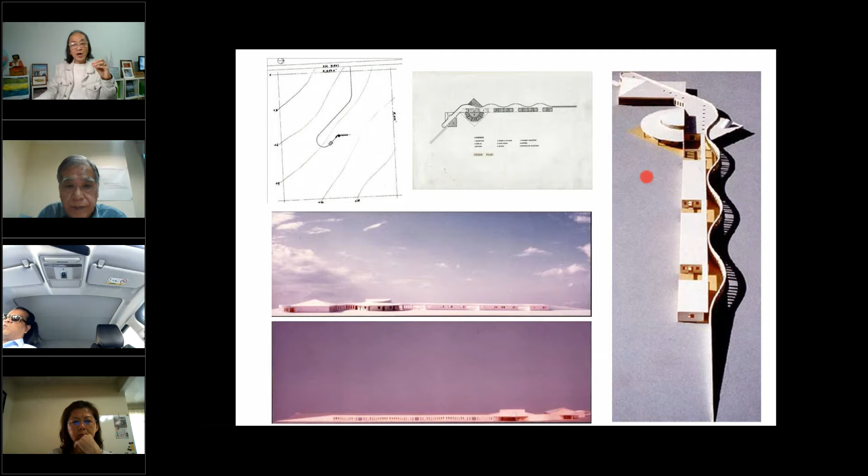In this first project, I learned about a few things. One, how can I place a building? In this case, I can easily place a building right near the access.

I decided to place the access road in the middle of the 100-acre site for a few reasons. To me, the journey to the building, the approach to the building, is as important as the building itself, if you have the opportunity to do so. So I want visitors, whether by bicycle, walking, or by car, when going to the building, to see the western side of the building, and then park further away. They get out of the car or bicycle and walk to the building.

This will prepare them psychologically before they enter the building. So to me, this was important.

The second thing was, how am I going to organize all the activities in the building? It was for a photography retreat of about 10,000 square feet. About 15 students will be in the school for about a week, and every week a new batch of students will arrive. There will also be 5 lecturers, each there for about 3 months. So you have a dormitory, a lecturer's quarters, a studio, an exhibition, and a canteen. How am I going to organize it?

I decided to organize the space in a linear form. I call it linear organization. And I introduced a wall, curvilinear, as a spine to organize all the activities together. Along this spine, or organizing principle, I have the reception, the dormitory, a studio, and the teacher's quarters.

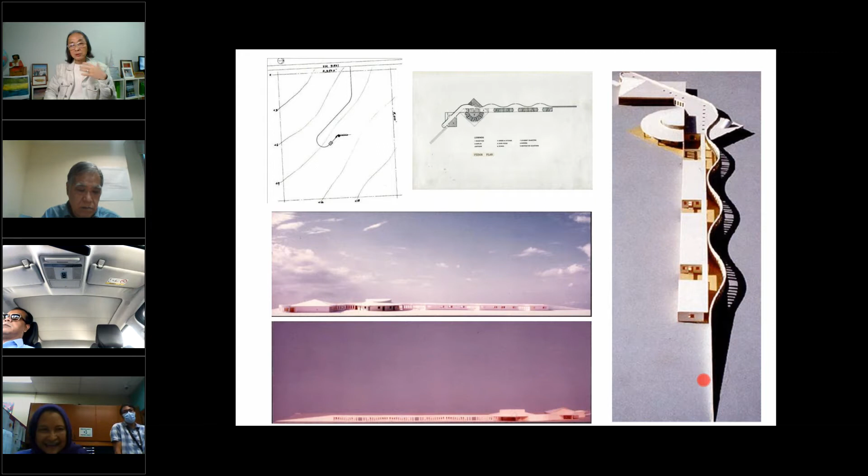At the same time, I want to create some kind of sculptural building in response to this vast landscape of 100 acres. It cannot be like a building on an urban site. The building had to express a sense of freedom, like it belongs to these 100 acres.

So these are the first two principles I learned for my design later on: how I can use a so-called linear organization to organize all my activities, how I can use something formal to contrast with something more organic, and how visitors can approach the building.

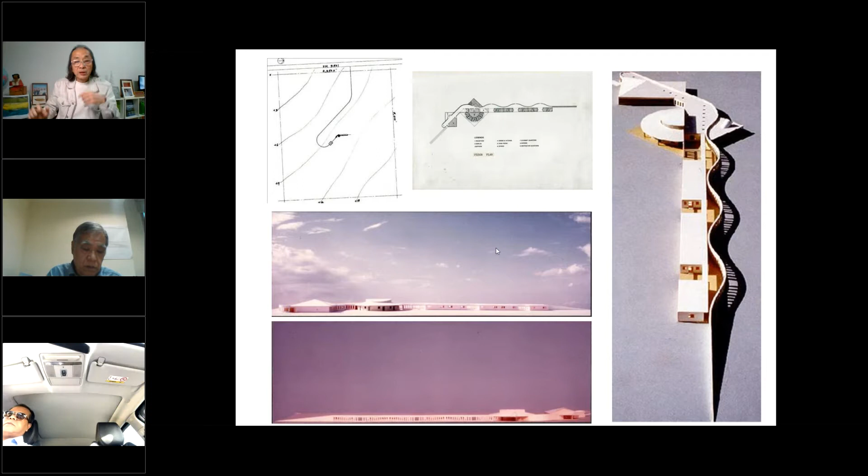The second project, also in the third year second semester, asked us to design a railway station in a small town, in addition to an existing railway station. The existing station was a historical building designed by H.H. Richardson. For most architects, when confronted with designing an addition to a historical building, they'll normally try to make the new building look sympathetic, or more like the historical building.

To me, as an architect or any building professional, we have to read beyond the surface. To show respect to the existing building, we have to understand its characteristics. In this instance, the building is a classical building.

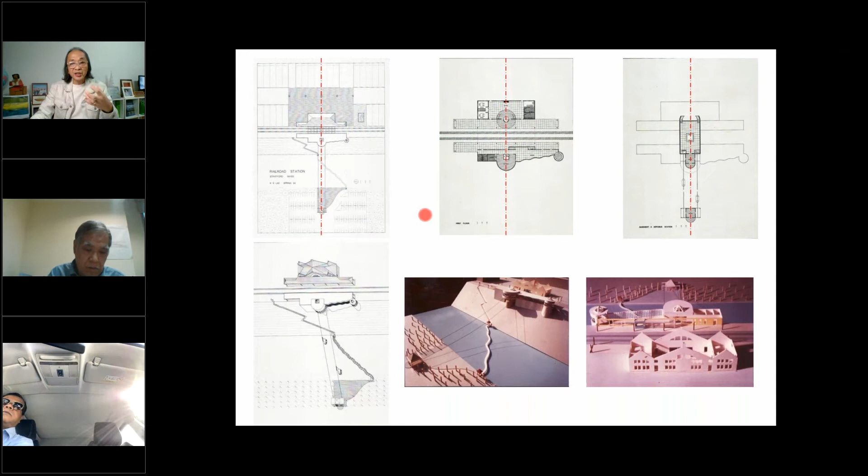It's a symmetrical building with a central axis. So I established an axis across the building. By doing so, the new building, while respecting the central axis of the existing building, can be more organic and more responsive to the environment and the site.

In this case, the new building has to be built on the river bank, and I also extended the axis all the way across the river. As commuters, some coming from the city center and some from the suburbs, they have to take a cable car across the river to the new railway station.

So in this assignment, I learned about axis, about symmetry, again about formality and organic form, and about the approach to buildings from urban and suburban settings - the contrast between formality and organic design.

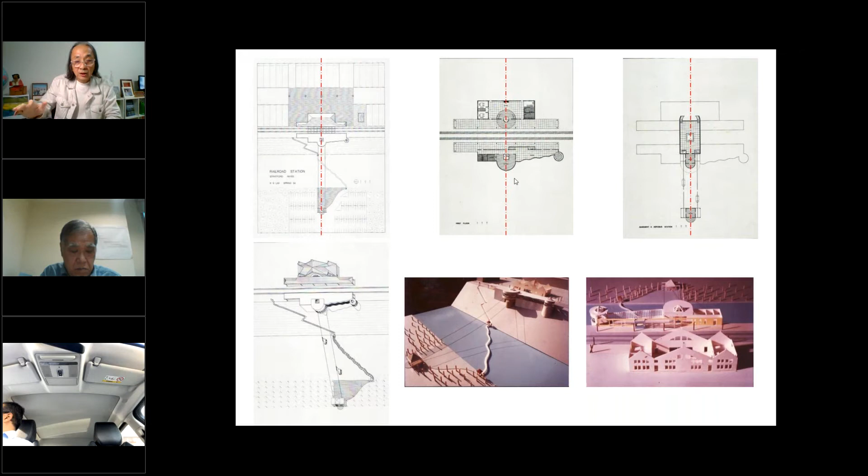During my last 3 years in architecture school in Houston, I worked part-time for 2 established firms, so it was very easy for me to find a job a few months before graduation. In fact, 3 months before graduation, I went to New York for 10 job interviews and received 10 job offers on the spot. I decided to join the Hillier Group, one of the most famous firms in the USA, and I was there for 5 years.

One of the most important buildings I participated in was the New Jersey Aquarium. The site was very interesting, almost similar to the site of my school project.

The building is in Camden, New Jersey, which we call the Garden State. The site is across the river from Philadelphia, to be exact, from Penn's Landing and Independence Hall.

So how am I going to approach the design of the building in terms of urban scale and urban design? Visitors will travel from New Jersey, and some will take a water taxi across the river from Philadelphia, so there are two approaches. How do I address the building's urban form for visitors from Philadelphia far away, and for visitors from New Jersey close up?

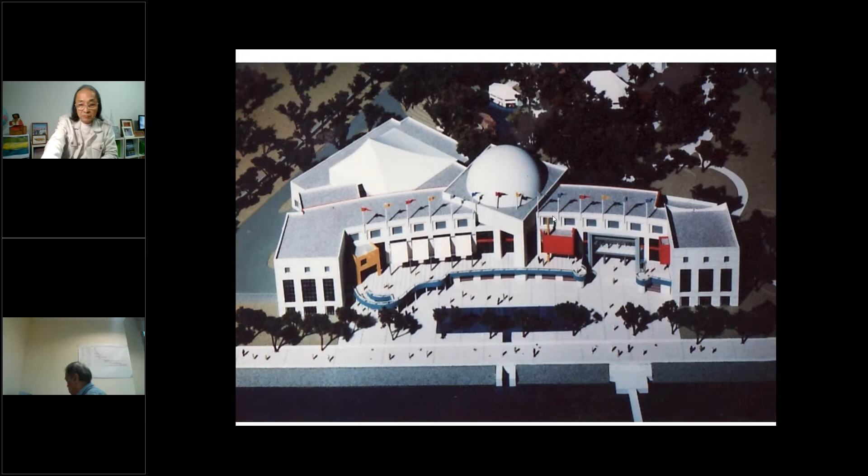I last visited the aquarium in, I think, 1992. And I know my ex-boss, Dato Alan Tong, is going to attend this webinar, so I decided to add three extra slides last minute.

I came back to Malaysia in 1991. My first boss and employer was Dato Alan Tong. I'm sure you all know him, he's a legend in the Malaysian property industry.

My first assignment was to design Mont Kiara Palma, which was phase 2 of the Mont Kiara development. Phase 1, Mont Kiara Pines, had 3 blocks, 10 acres, and 500 units. Mont Kiara Palma was 8 acres with 400 units.

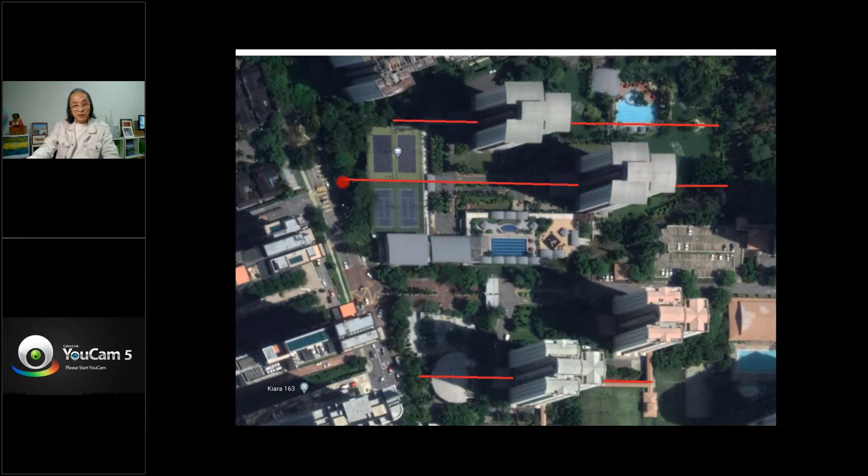I established an axis at the middle of the so-called parking garage tennis court. Along this axis, I have the sitting area for the tennis court and the entrance to the parking garage and so on.

And then we have 2 swimming pools. One swimming pool is above the parking garage, which is a bit more formal. I decided to have a second swimming pool in a more organic, more informal way.

And since we need to have a detention pond, we decided to have an artificial lake. And then we created an island at the artificial lake. And in the island, we have a swimming pool and a restaurant.

There is a short pedestrian bridge for you to walk across to the swimming pool. We created some kind of psychological circulation for you to go to the swimming pool on an island, like you're going to a resort. And we also have an amphitheater near the artificial lake.

And then that's how I located the Royal Tower. It exists together, in axis with the amphitheater.

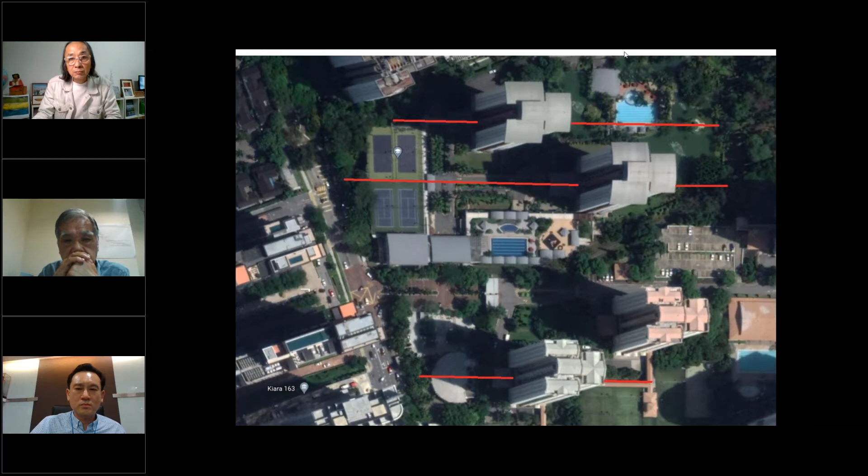This is Mont Kiara Palma. I used to own a unit on the 15th floor. I was hoping to buy floor number 8 or the 18th floor, but they are more expensive - Malaysians love number 8 and so on. So I ended up on a unit on the 15th floor.

So I have to go back to this one again, sorry. My second project, designed while I worked for Dato' Tong, was a shoplot in front of Mont Kiara Pines - a small shoplot. I introduced a half circle, to have something more formal on one side facing Mont Kiara Pines, and something more organic facing the busy traffic surrounding the site.

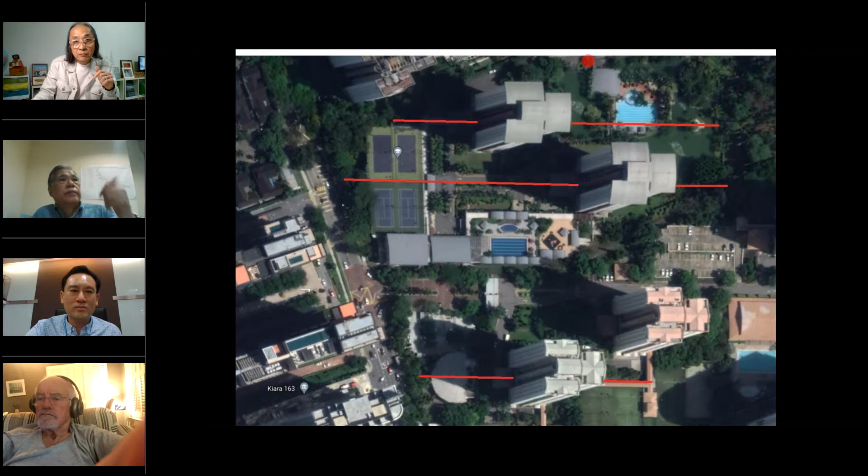This is the Mont Kiara shoplot. And then in December 1993, 2 weeks after I joined BEP Architect,

I was asked by one of the directors, Mr. Ho Wai Peng, into his office. He said he had one good news and one bad news to tell me. The good news was BEP Architect, at the very last minute, was invited to submit a design proposal for Putrajaya, the new capital city of Malaysia.

It was an honor and a super important job for the company. The bad news is I've been appointed to design it, and I only have 2 weeks to do so. It was 4 p.m. and he gave me a topography map. The same night, at about 10 p.m., I went back to the office, to one of the small conference rooms, to think what I should do about the project since I only had 2 weeks.

As I did not have time to visit the 11,000 acre site in Prang Besar, I looked at the topography map, trying to get some inspiration, some clue on how our new capital city should be. In my mind, two things came across.

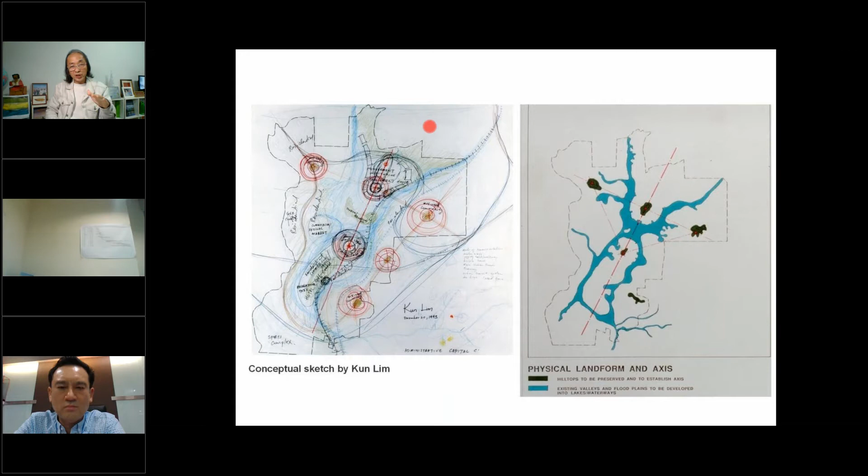I looked around the topography map for inspiration again, and I found there are 2 rivers nearby, Sungai Langat and Sungai Chuau, and some low valleys and river streams in Putrajaya, or Prang Besar. I looked around for a contour point of 22 meters, and decided I should fill up this area with water. And thus we created a so-called semi-artificial lake.

So this was the initial concept of Putrajaya, and it was created in 10 minutes.

And I asked the perspective artist with BEP Architect Research to come in to help me produce some drawings, together with a few of my former colleagues from BEP.

In my mind, Putrajaya has to be a garden city. And I lived in Princeton, New Jersey for 5 years. To me, Princeton is a garden city. When you're in the garden city, you do not have to go to the garden anymore - the city is a garden. And in the garden city, the garden, the environment, the landscape should be more prominent than the building or the infrastructure. That's what I had in mind.

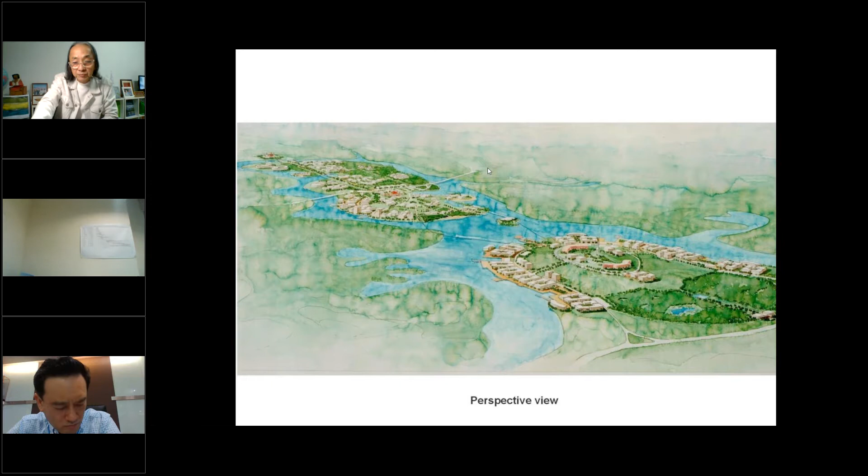Along the spine, we have certain government buildings. As I know this is going to be a government, we have to have certain formality. But at the same time, I do not want the so-called central axis to be too powerful.

There's a reason in this early concept we have a core island. There's no continuous boulevard like what we have today, because we want it to be very important, very monumental, but at the same time I do not want the Prime Minister, where his office will be located on top of the axis, to think he's a king.

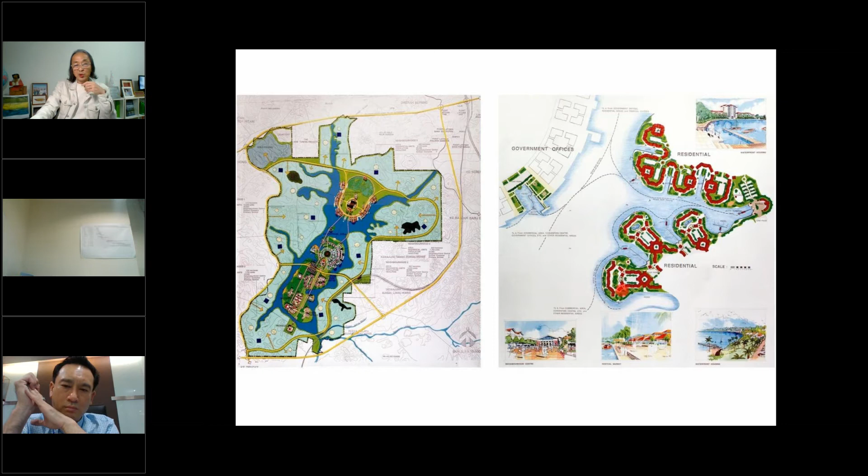We also want the residents in Putrajaya, beside a normal public transport system, to be able to use a water taxi to go to work, to go shopping, and so on.

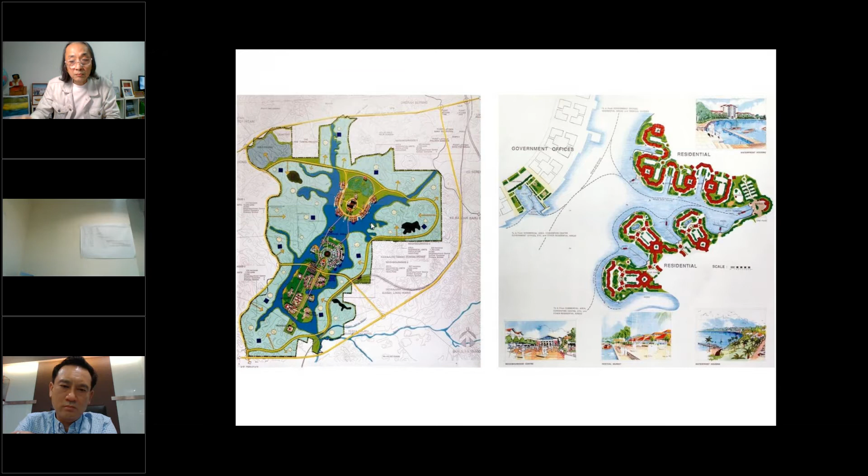Also, in my initial idea, all the buildings in Putrajaya should be very simple, down-to-earth buildings. It's almost like the buildings designed by Geoffrey Bawa for government facilities in Sri Lanka.

In my imagination, Malaysia is a democratic country. The buildings should be very down to earth, very humble, so people like my mother, a farmer, would feel comfortable walking into the government building.

We won the competition. Our concept was selected by the former Prime Minister, Dr. Mahathir. Then we were asked to form - the government asked all the consultants, a few major consultants in Malaysia, together with JKR and the Town and Country Department, to form a consortium to develop the design of Putrajaya. I was appointed Deputy General Manager and so-called Chief Designer on the project.

In Putrajaya, along the spine, beside all the government buildings, we also designed and advocated for an infrastructure tunnel below it.

With the exception of the Prime Minister's building, which we think should be more monumental, more prominent, our initial idea was that all the buildings in Putrajaya's government precinct should be very simple, almost like the shop houses in Malaysia - 2 to 3 story buildings, all with a walkway, all connected by verandas.

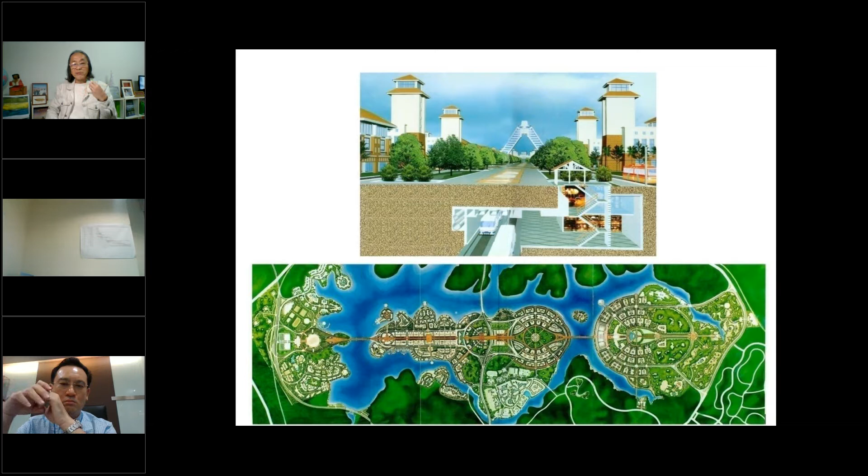I was also involved in the Putrajaya memorial a few years later. This is what we have - this is what Putrajaya is now. I'm very happy about the overall environment, the lake, and so on.

Her name is Sri, so we have to call her Puan Sri. She came to work with us when my younger son Andrew was born, so she was with us for 14 years until Andrew and my family came to Seattle. Now she's in Kalimantan Tengah, involved in some kind of home recycling business. I know for a fact that my children love her more than they love me - even now, they still send her money from time to time.

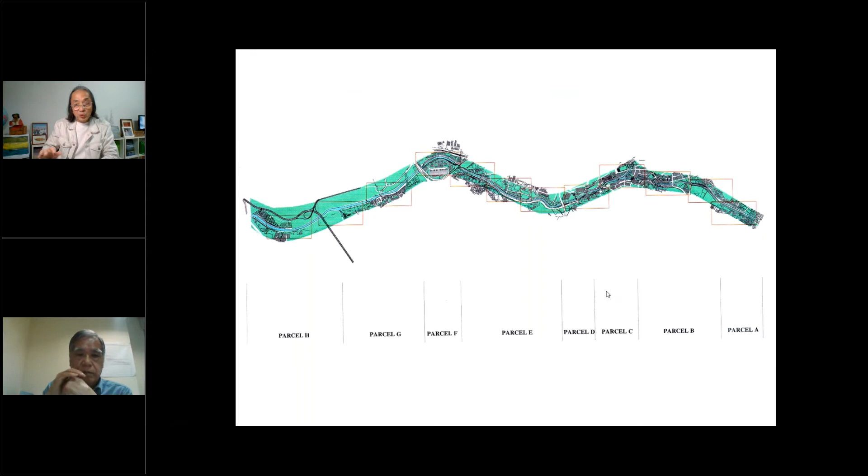The project was divided into a few parcels. In certain parcels, it will be served by, I think, about 8 monorail stations.

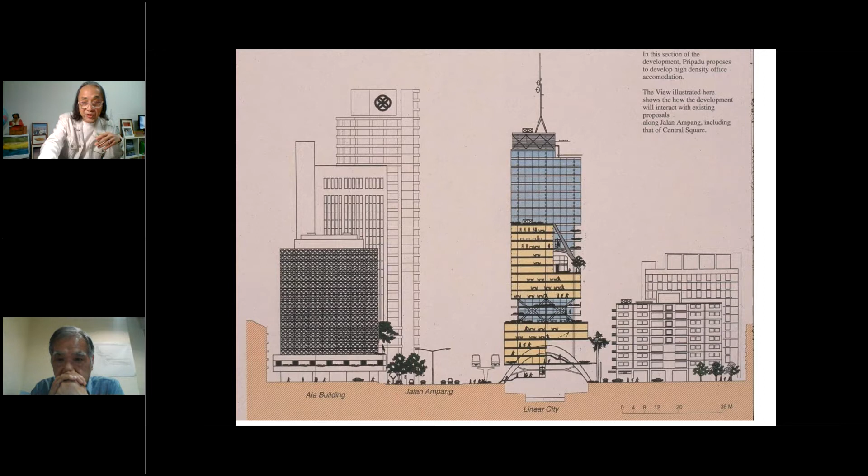The longest and most expensive parcel is called Gigaworld. It was located along Jalan Ampang above the Klang River, 2.4 kilometers long. It was to be the longest building and probably one of the most expensive buildings in the world.

It was to be built above the Klang River. We were not allowed to put a column inside the river due to hydraulic reasons. So we engaged Sir Anthony Hunt, one of the most talented structural engineers in the world from England, to help us come out with a structural solution on how to span across the 45-meter river.

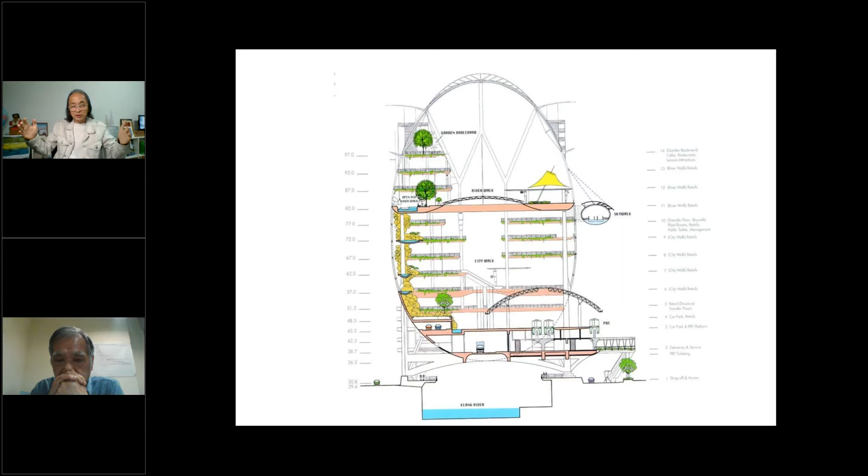His solution was a transfer. A transfer is something like, for example, you have a monsoon drain, you put a table above the small monsoon drain, and then you put a book above it. So this is what we call a transfer.

There were many projects along the linear city. Another one which I was quite excited about, we call Parcel A. We wanted to use Parcel A to connect Kampong Baru with the Golden Triangle of Kuala Lumpur by building developments above the Klang River, and also to introduce certain urban plazas on the Kampong Baru site.

All the projects did not take off due to the financial crisis in 1998, even though all of them already had building permit approval.

In KL Linear City, besides the property development, we also had the so-called KL monorail and the New Pantai Highway. The New Pantai Highway was completed, and Phase 1 of the KL monorail with 11 stations was completed.

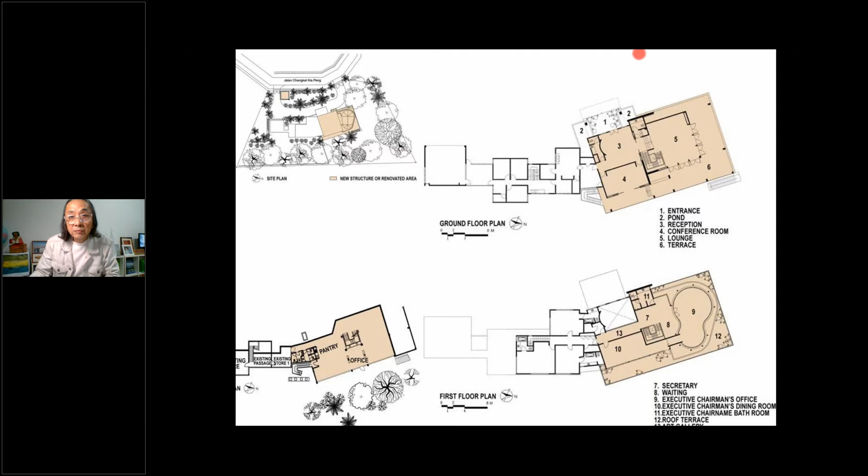So this is the new office with the new staircase on the ground floor, connected to the sub-basement. And this is Tan Sri Lim's room. It's a very small room, but it looks very big because I used a curvilinear form for his room. When you introduce curvilinear forms in a room or space, you are creating a multiple point perspective, and you make your space appear much bigger than it is.

A view of the Petronas Twin Towers from his office.

This photograph shows the contrast between the existing building, which is very solid and very formal, and the new addition, which is more transparent and more organic.

Another project was a house for a good friend of my brother in Country Heights, Damansara. Normally, I sketch out the drawings myself initially. I call it a modern interpretation of the kampong house.

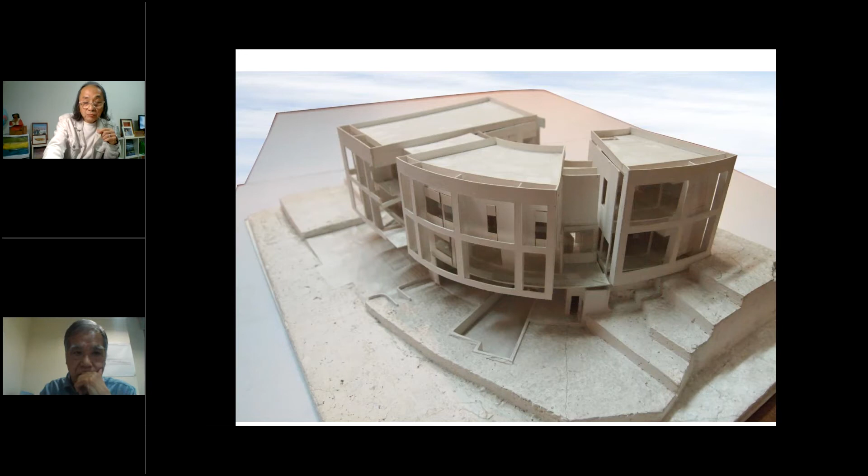The nicest views are facing west, which happen to face the hot sunset and hot sun.

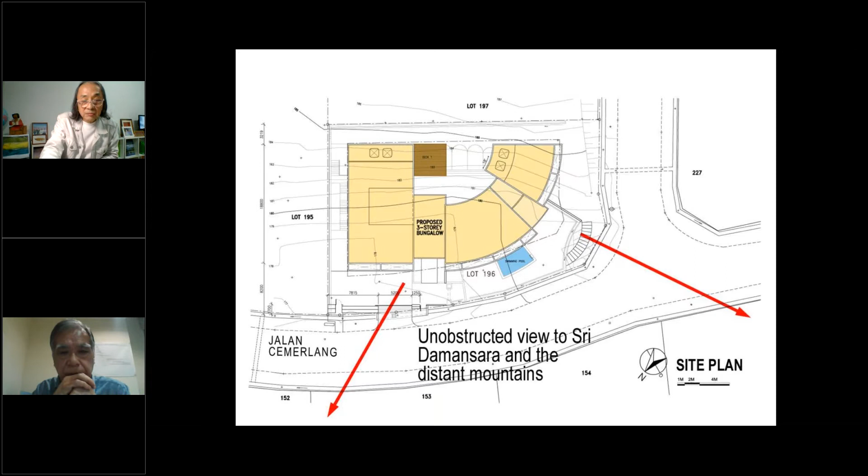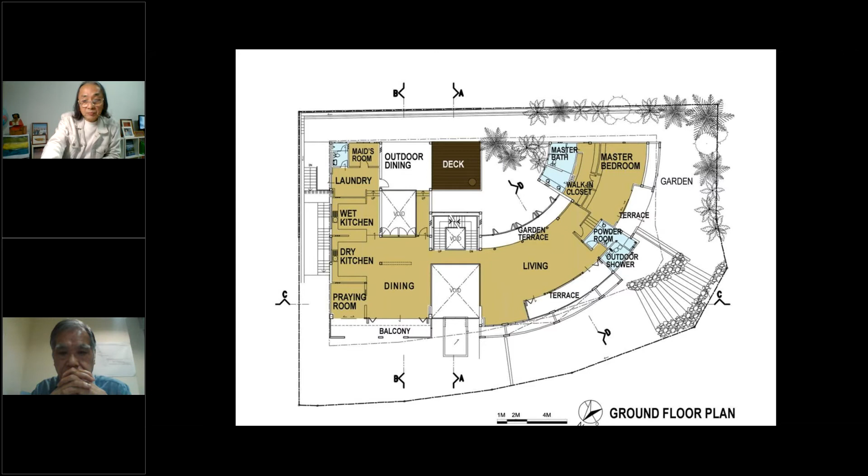So we decided to make the ground floor very open to encourage cross ventilation. We also introduced a second layer, a so-called transitional space or second layer of skin, such as terraces and so on, to protect the inhabitants from the harsh tropical sun. The swimming pool on the ground floor encourages cool air to cool the slab above and also encourages cross ventilation.

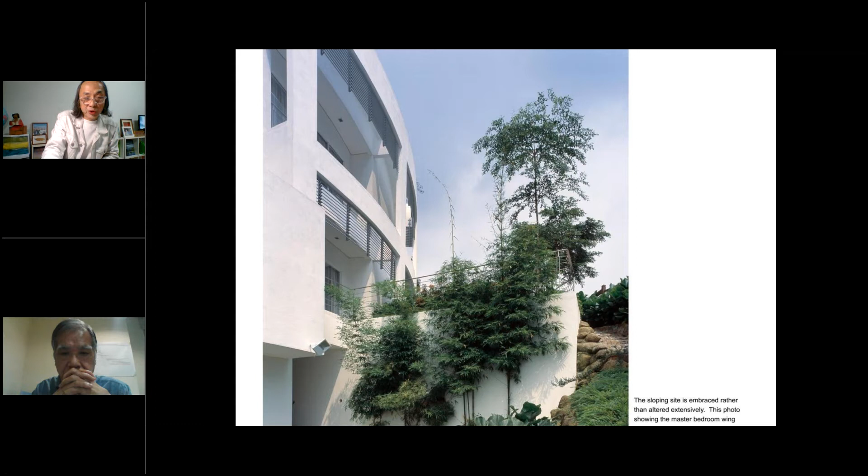We preserved the slope, so the house is 2 stories in certain areas and 3 stories in others. The entrance has a fish pond, with grass and a grass bridge.

On the so-called second floor, we have a dining room and living room, separated by the entrance foyer. I also introduced certain vertical elements in section, to create a visual connection between the lower and upper floors. Besides being a modern interpretation of the kampong house, of the Malaysian village house, this is also a 3-generation house.

This is also a 3-generation house. The owner and his 2 sons and their families also live together. So I introduced this so-called vertical connection, so that the grandmother can call the grandchildren to come down to have dinner together with them.

A lot of so-called clerestory windows introduce indirect natural light and cross natural ventilation, or the wind tunnel effect, to cool down the building both inside and outside.

I think this house won the Trends magazine award for the so-called best house in Malaysia, the 20 years award for the best house design or built in Malaysia many years ago.

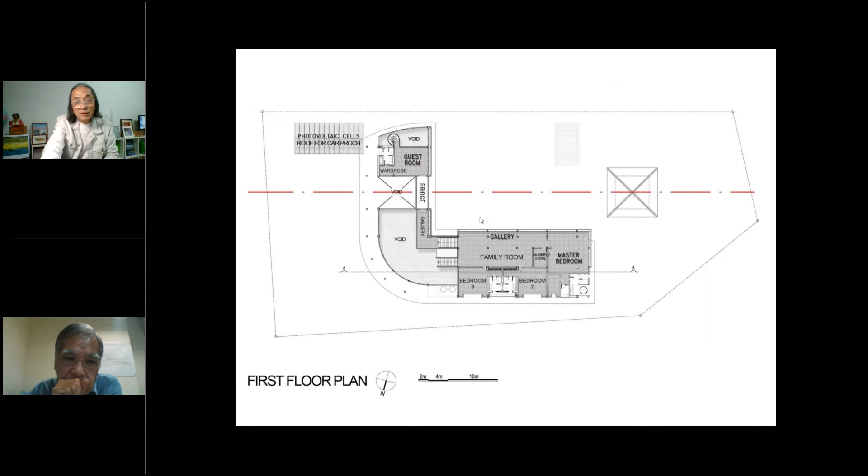The only requirement - the owner gave me almost 100% freedom to design. The only requirement he gave me was, he was given 8 pieces of 22 feet timber columns, and he stored them at a warehouse in Sabah. He wanted to use them. So that's how the height of the house was decided.

This is a bridge connecting the guest room, guest quarters, and the main house.

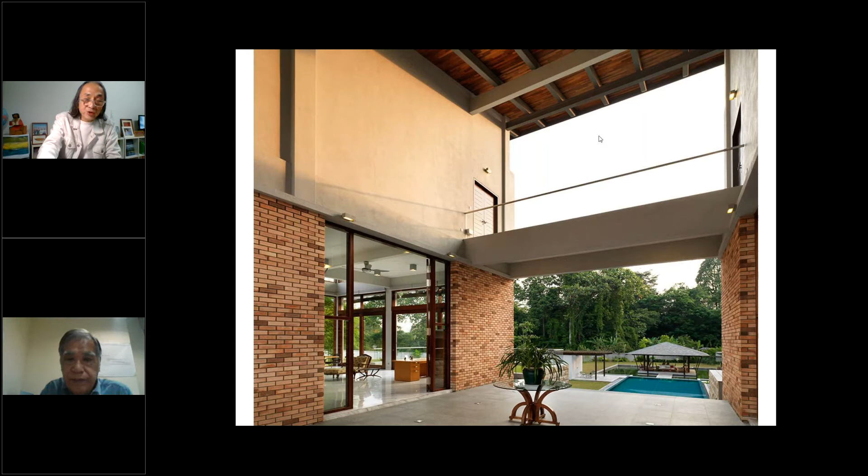And again, in the living room, I introduced a curvilinear, so-called geometry to make the living room much bigger than what it appears. Whenever there are windows, it's always full height with sliding windows, sliding doors, and so on, to help make it feel, when fully open, like you're outdoor even indoors.

Home office and the guest room.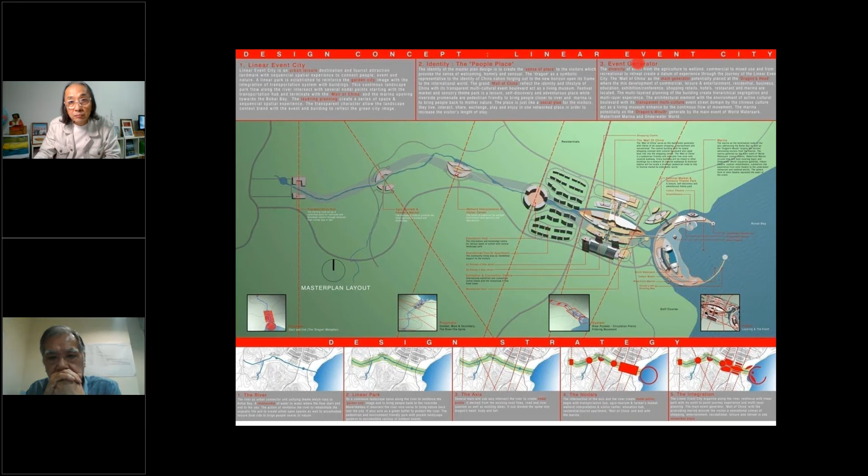This is another project in China. It is in an area called Xiaojing, not far from Shenyang, not far from Shenzhen. My client was a public listed company in Shenzhen. We visited the site, quite an interesting site.

After we visited the site, before dinner, and in China a long time ago, normally the client would ask you to drink wine and liquor during the dinner. They were heavy drinkers, so I told my clients, please give me 10 minutes, let me sketch up some concept before our dinner. I quickly sketched up the concept of how to develop this project, and he approved my concept immediately.

I sketched up the second concept the next day after I became sober. The idea was to create as many different types of diamond-shaped units as possible for marketing purposes. I decided to bring in a water feature for the diamonds, so that we could have certain villas, waterside villas, waterfront apartments, and so on.

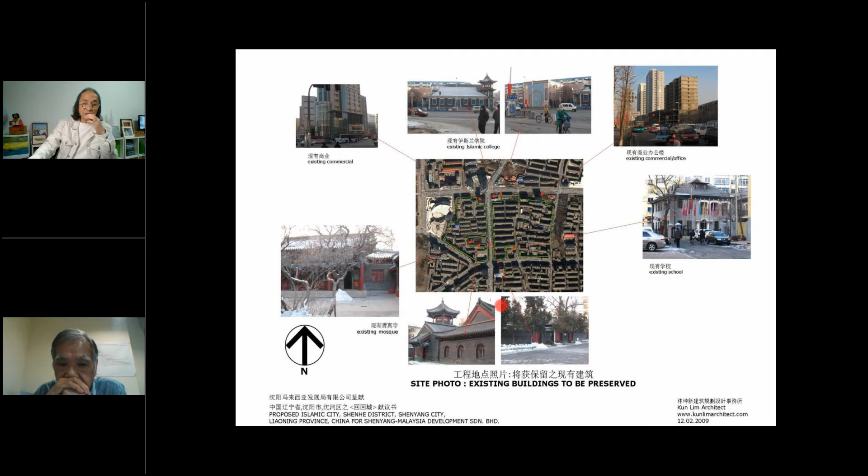It was a bidding exercise. The consortium asked me to produce a proposal to submit a bid in the competition against bidders from Hong Kong, Indonesia, Singapore, and so on.

Immediately after I visited the site, in the hotel, I came up with the concept. My idea was, initially, to preserve the existing mosque—not just preserve it, but make it the focus point of the entire development by introducing a pedestrian mall surrounding it, a plaza in front of the mosque, and a bazaar for the Muslims along the axis.

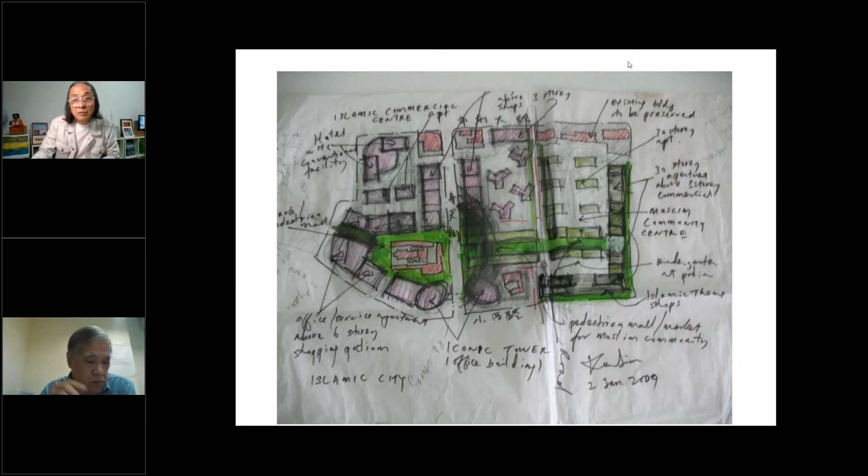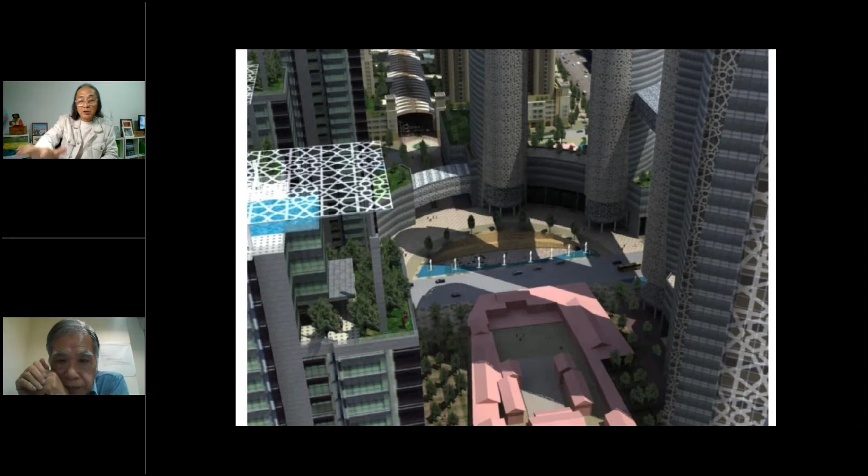We produced a concept, drawings, and also an animation with voiceover, all within a month. Then we presented the proposal to the governor of Shenyang, Liaoning Province, in Singapore, and my client won the bid. Unfortunately, the project did not kick off due to financial issues.

From 2005 until now, I've been involved in a lot of projects in Indonesia for companies such as Lippo Group, Sinarmas Group, and FKS Land in Sulawesi and Java.

This is a master plan of Lippo Cikarang, an industrial township near Jakarta. It was an industrial township, and what you see in the colored portion is the part that I was asked to redesign, or reimagine, for the city of Lippo Cikarang to make it more exciting.

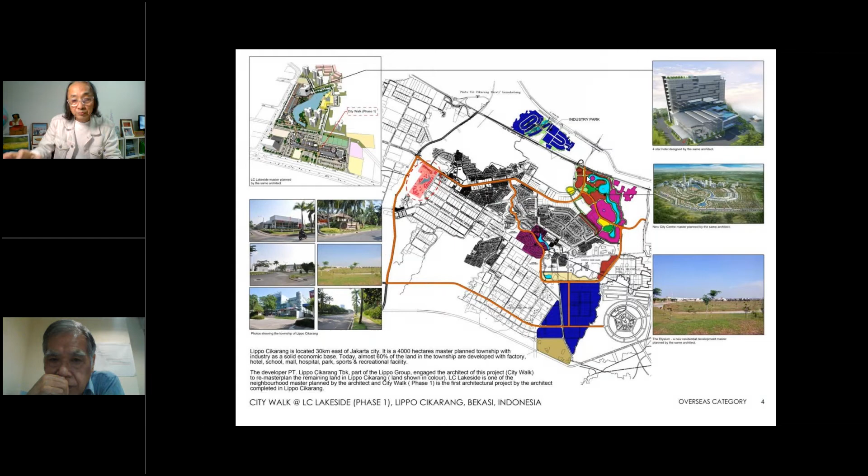I'm going to show you two projects that I designed and eventually implemented. First, we call it City Walk. I was asked to design a temporary shopping mall for the development, plus some hotel, condominium, and an international school. Phase one was to be a street mall, a temporary structure.

I got the inspiration from the site—there were a lot of existing trees on the site, shown in darker green. Basically, the existing trees on the site formed my concept. For example, in this courtyard, there's a courtyard because there are existing trees there. I also introduced a rotunda as a focus point, as a main entrance point, to attract people to the street mall.

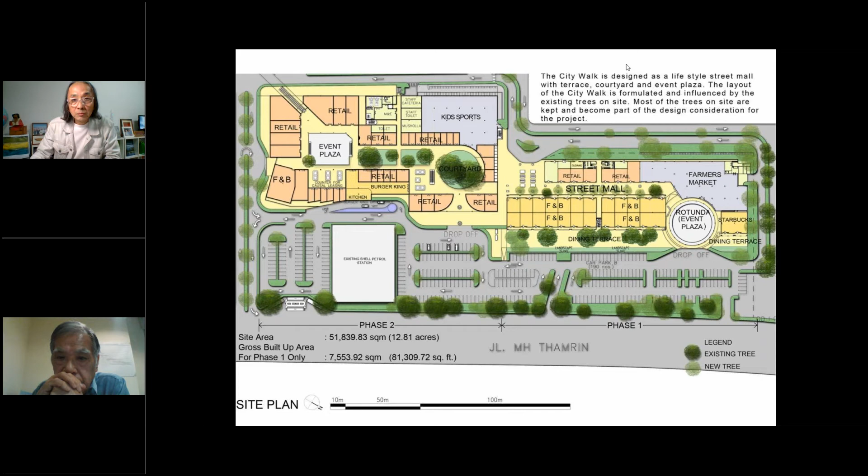It was completed more than 10 years ago.

The second project I'm going to show you is what we call City Center at Lippo Cikarang. My main idea was to introduce a linear lake as a spine to organize all the buildings and development along the city center.

Since there are river streams or low areas on the site, it's not just a linear lake to organize all the buildings and the entire township together—it also serves as a detention pond for the developments.

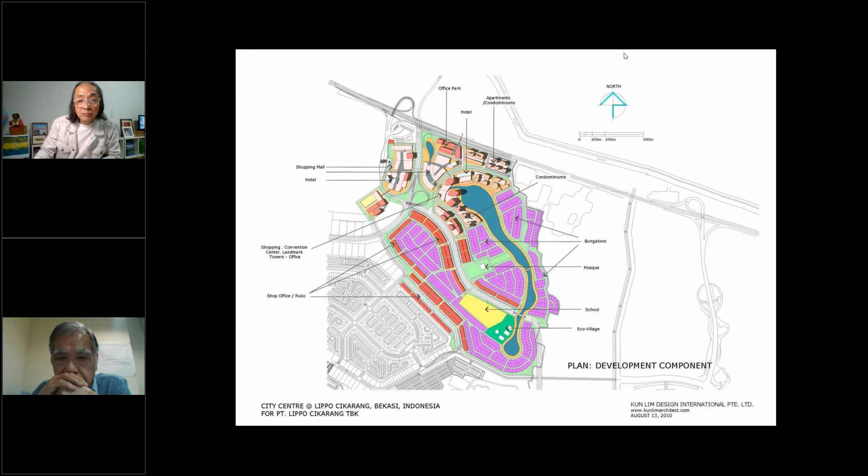After I came up with a concept, along the way, Lippo Group engaged HOK from USA to remaster the township. They still maintained my initial concept, but they increased the density.

Then subsequently, a developer from Wuhan, China joined them, and they changed the name to Meikarta.

The owner of Lippo Group is James Riady. His mother's name is called May, so they call it Meikarta.

And then after that, they decided to increase the density further, and they engaged a Japanese consultant, architects and engineers, Mitsubishi Jisho, to come in and remaster the entire township again.

That's what the township looked like. But fortunately, they built the lake according to my idea, which I'm extremely grateful for, very happy.

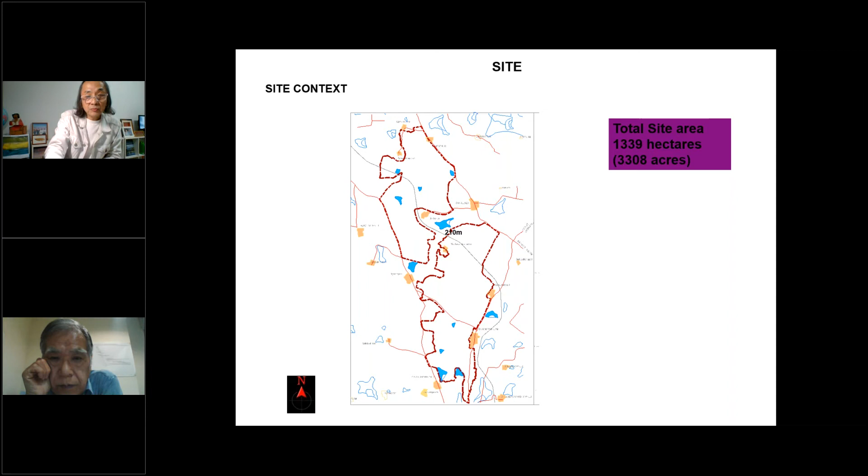It is a very complicated site. The site is divided into two portions, north and south. At the same time, there is an existing railway that cuts the site into 4 parts.

So my associate in Bangalore and our clients did not know how to solve the problem. To me...

When there's a crisis, there's an opportunity. Just like the Chinese word, crisis in Chinese we call 危机 - wei is crisis, 机 is opportunity. When there's a crisis, there's opportunity. And I look at it, I visit the site, I look at it.

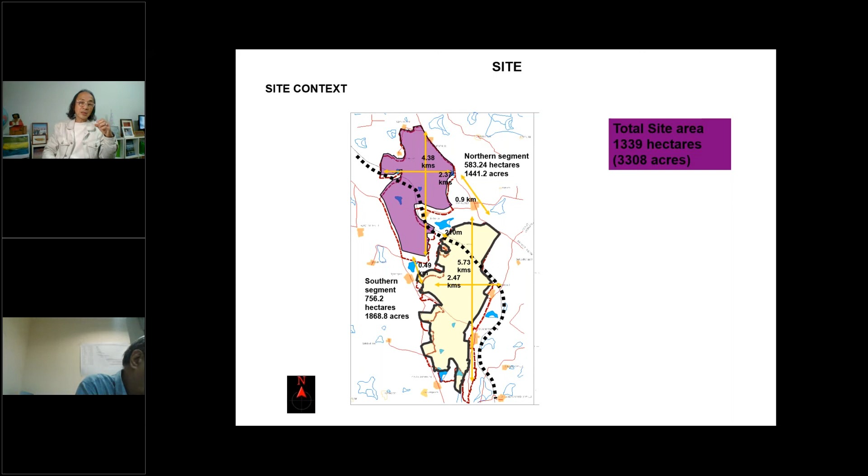The railway route bisects the site into 4 parts. But we need a green buffer along the railway route, so I decided to enhance the buffer and make it a linear spine.

to organize the whole township together. In this linear spine, besides having a linear park, we also have all the underground infrastructure such as water piping, electric piping, and fiber optics along the spine.

And from there, from the spine, they can distribute it equally to the rest of the township. So those are my initial concepts.

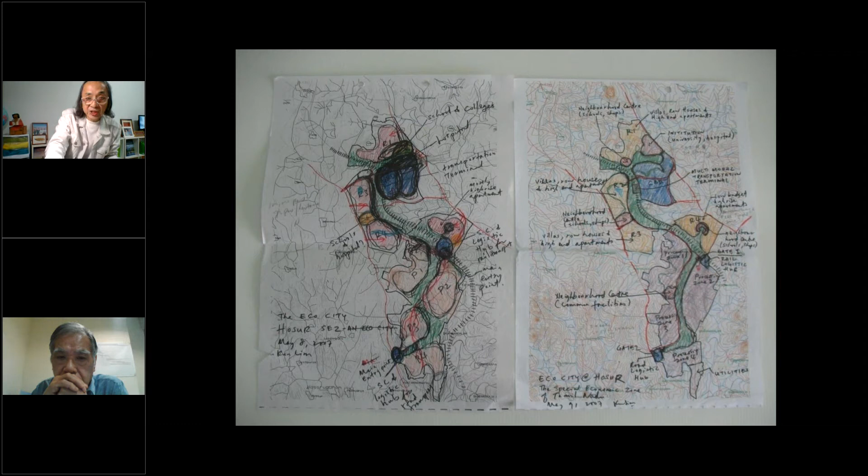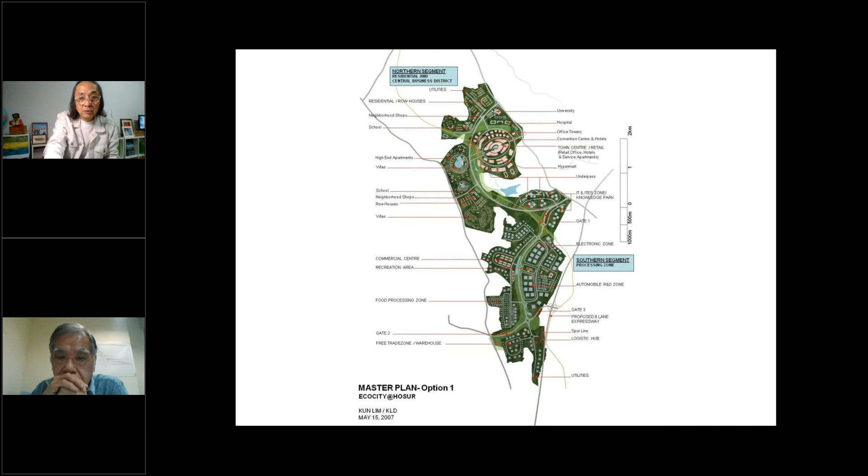We won the bid for GMR, but unfortunately the project again did not materialize due to land acquisition issues in India.

And the second project I worked on in India was for a campus for a US technology company in Trivandrum. My concept was again to use a spine.

to organize the campus together. In the campus, in the design brief, we have three groupings of buildings.

The first one was to be a corporate campus for the top executives and chairmen and so on. Second, for the young engineers. Third, the residences for the workers.

So I use a spine to connect everything together, and along the spine you have a guardhouse, a cafe on the water, a gymnasium, and so on.

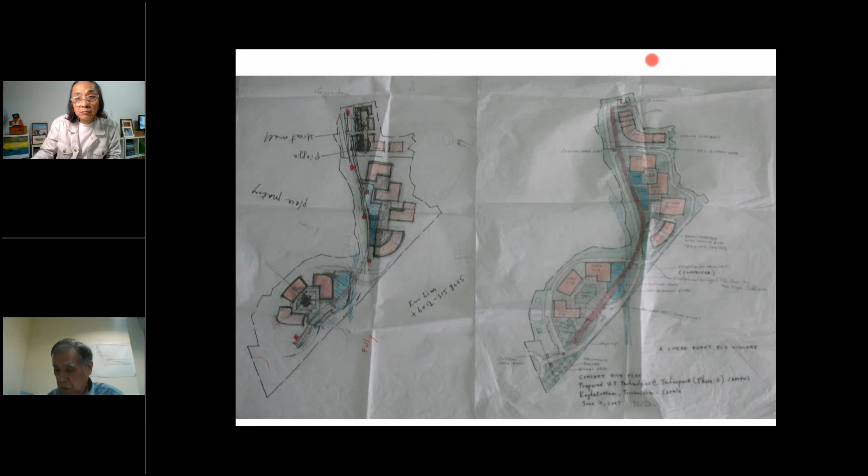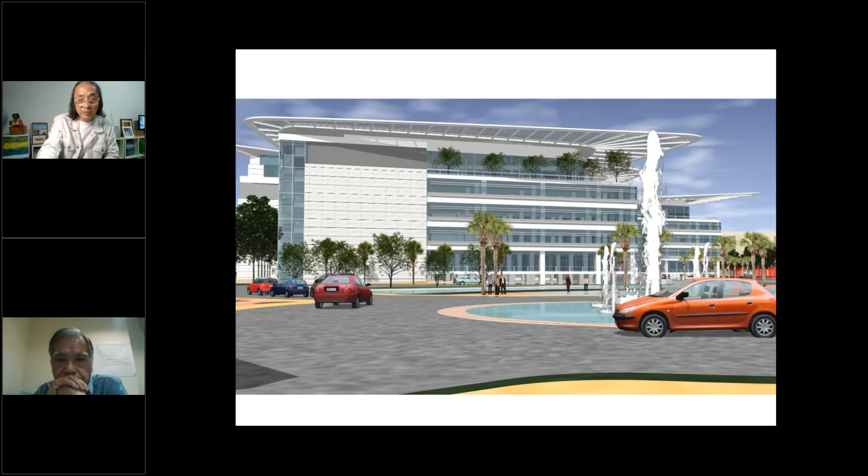For the phase 1 building, which is the so-called executive office blocks complex, the focus point is a big plaza in the middle.

And just like all our buildings, they are designed for sustainable design, for green design, for the green LEED or green building index, and so on.

And in 2005, my brother - this is my brother - he's one of the top doctors in Taiwan.

He used to be a top executive for some of the biggest hospitals in Taiwan, such as Chang Gung Memorial Hospital. He was also a professor in medical school in Taiwan.

In 2005, he joined Tzu Chi Group. Tzu Chi is the biggest so-called charity organization in the Chinese world, founded and started by Master Cheng Yen.

So my brother asked me - I would say he instructed me - to go to Taiwan to meet up with Master Cheng Yen to see what I could help out with, what I could work on with Tzu Chi.

Tzu Chi is involved in projects all over. They own 6 hospitals in Taiwan with about 4,000 beds total.

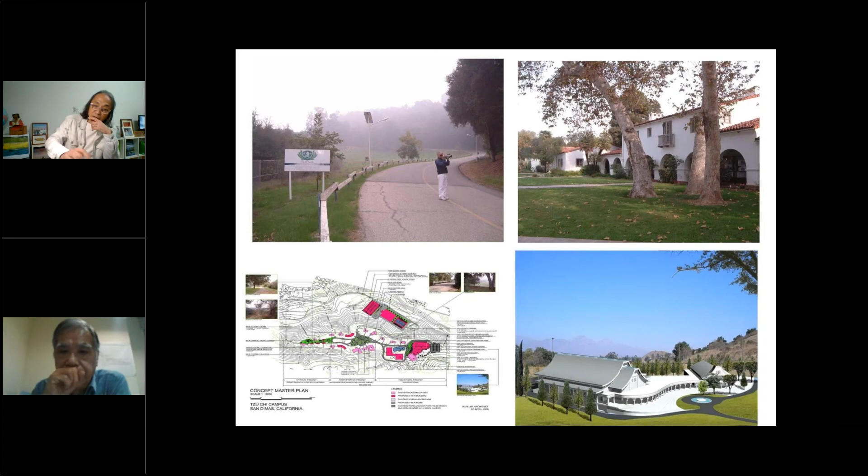My first project for Tzu Chi was in San Dimas, California. I went there in October 2005 to visit the site, and my job was to remaster the entire township, the entire campus for the Tzu Chi headquarters in California. My second project for Tzu Chi was a Tzu Chi campus in Kepong, Kuala Lumpur.

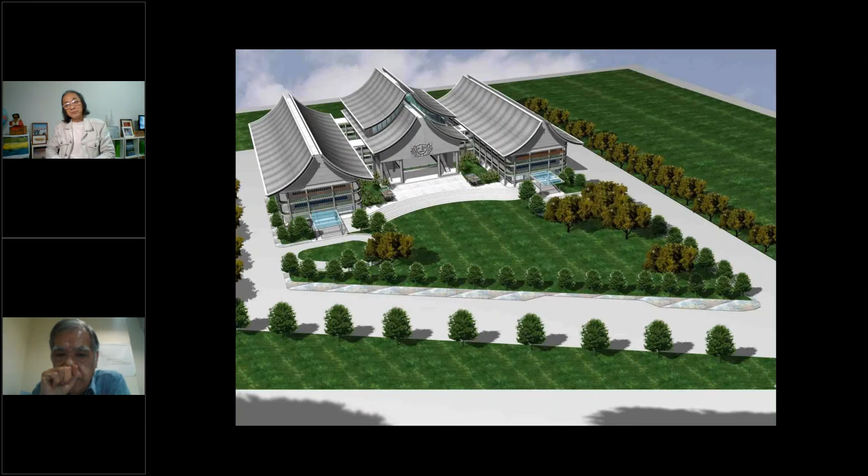Before I designed, I read a lot of books about Sushi and Master Cheng Yen. Master Cheng Yen believed that a building is a teacher in silence. A building can influence a person, can influence the inhabitants, the people, the users of the building. In most of the Tzu Chi campuses, the buildings are used for educational purposes, with students from young kids to adults going there to learn about the mission of Tzu Chi. So she wants the building to be very simple, very calm.

And it also had to be a good neighbor building. So immediately my concept was to have a U-shaped building, like the building is hugging you. In Chinese, in Tzu Chi philosophy, we call it 拥抱苍生 - like you hug the earth, you hug the world. It's hugging you. The building asks you to come in.

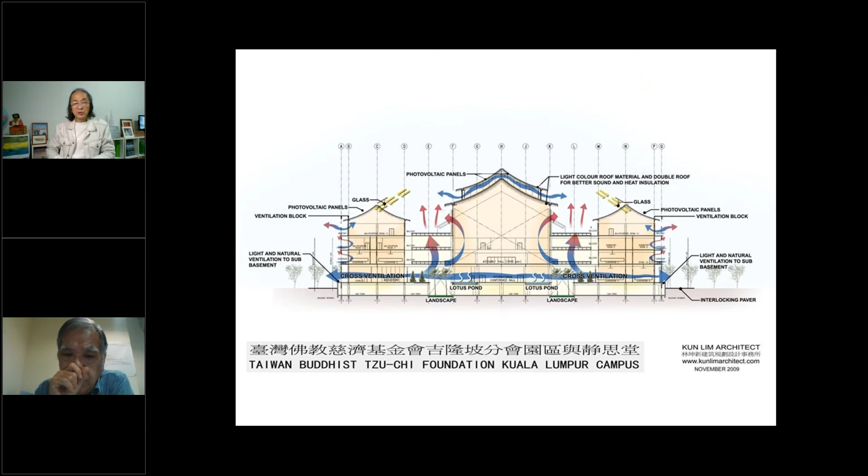I divided the building into three components, in which I have a so-called in-between space, a two-way transparency building to encourage cross ventilation and so on. The building is designed and built to meet the GBI, the Malaysia Green Building Index gold standard.

Throughout the course of design, I met Master Cheng Yen many times, maybe 15 times in Taiwan. The project was completed maybe about 7 years ago.

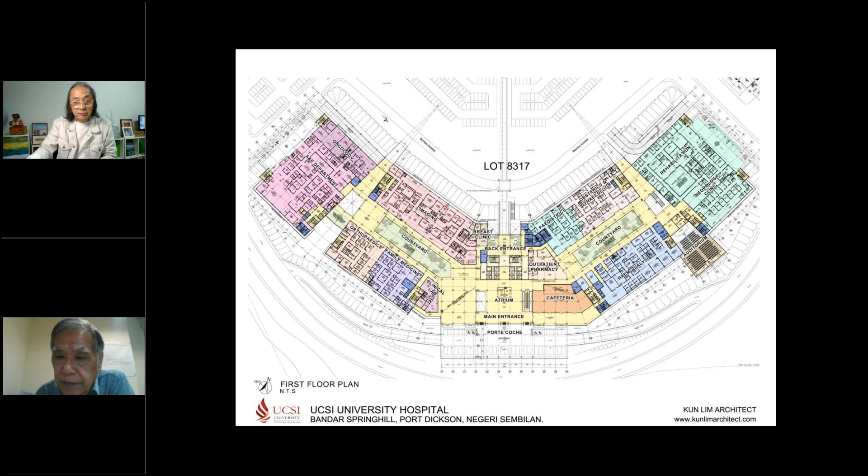This is UCSI University main campus in Negeri Sembilan. I did a master plan, and we were also asked to design the hospital and the medical school. My concept was to use an open linear courtyard to organize the hospital. Then for the medical school, the ground floor is very open to encourage cross ventilation. We also introduced a series of sky gardens and so on.

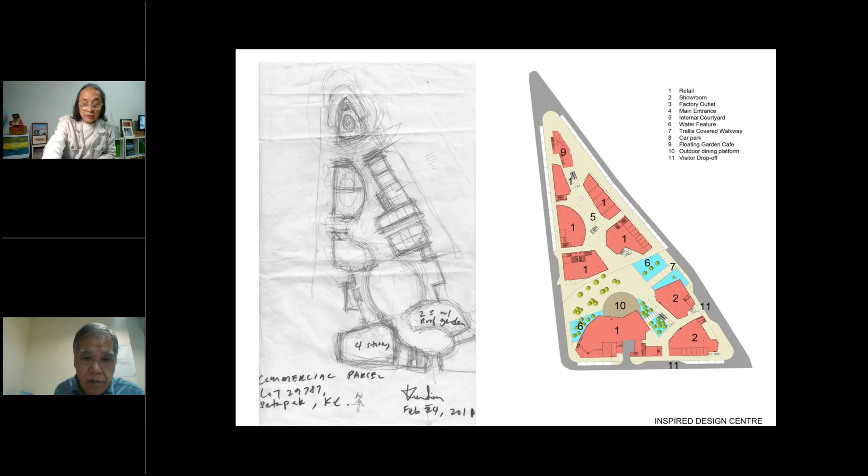This is supposed to be a museum or exhibition center for furniture in Setapak. I designed it for Skyward. It was a very interesting project, but unfortunately, it was not built.

My mother - I want to talk a bit about my mother. I was away from Malaysia for about 9 years, 10 years. For the first 9 years, I did not see my mom at all. Then, 9 years after I left Malaysia, my mom and my sister came to Queensland to visit me. A year later, I decided to come back to Malaysia.

My father passed away when I was 3 years old. My mom, by herself, managed to raise 9 of us to become architects, engineers, and doctors. So I decided to come back to be with my mother. I was together with her for the last 20 years of her life, and I was thankful for that.

After she passed away, I knew I didn't have to be in Malaysia anymore. I knew I had to give an option to my children, just like the kind of alternative and options my mom gave us brothers and sisters. So I moved to Seattle, a very beautiful city.

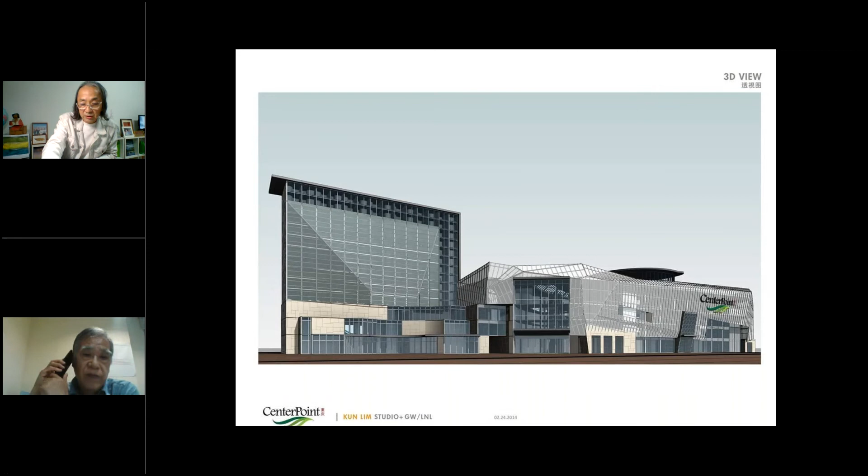He was from Los Angeles, but he lived in Chongqing. He called me, and that was my first project - he hired me to design a shopping center in Chongqing, China. So, a few minutes after I set up my company, that was my first project for my new firm in Seattle. Then initially, I was involved in a few small jobs in Seattle.

The design was completed, and we also received a permit to start construction. But the mosque committee does not have enough budget to build it. The construction cost in Seattle is very expensive. A building like this mosque will cost about $400 per square foot, which is almost 8 times higher than the construction cost in Malaysia, due to the labor cost in Seattle.

Just for comparison, in a construction site you have a guy, the so-called safety officer, who conducts traffic with a signboard, a very easy job. In Seattle, a person who conducts traffic earns about $5,000 to $6,000 per month.

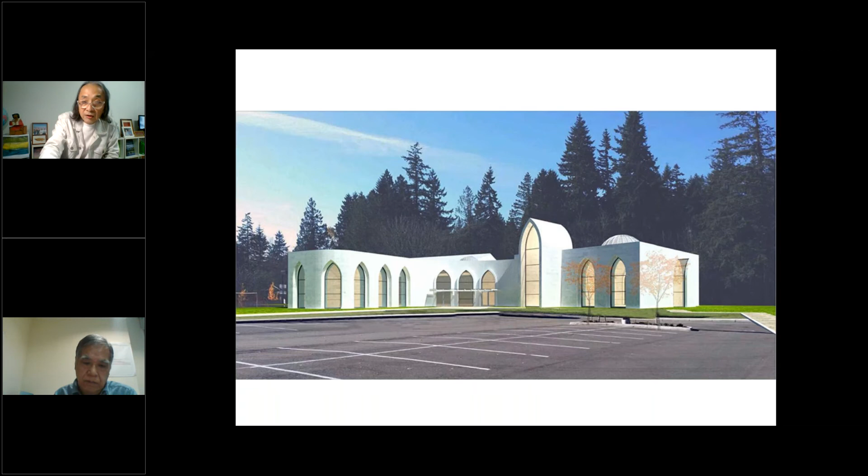The job did not kick off, but the imam of the mosque hired me to design his restaurant in Seattle.

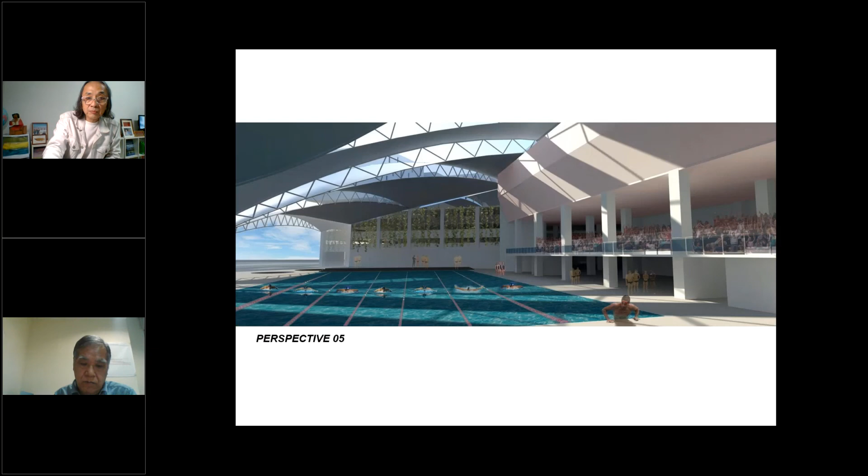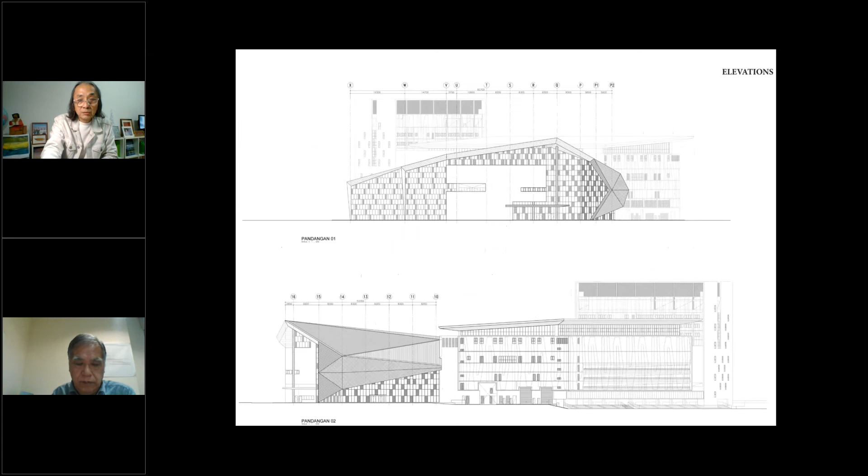I have to go through this very fast, I think I'm running out of time. The project is fully completed, but this photograph was taken in December 2019 when I last visited the building.

I work on a lot of projects for Dato Michael Teo of PKT. This was my first project with him. We call it One Logistic Hub.

It's along the Kesas Highway in Shah Alam. We have 3 buildings. One we call the Ship, our first corporate headquarters. The second one is a warehouse we call the Wave. And then the tallest building we call the Lighthouse, a vertical warehouse, office, and campus for the Peninsula College, also owned by PKT Group.

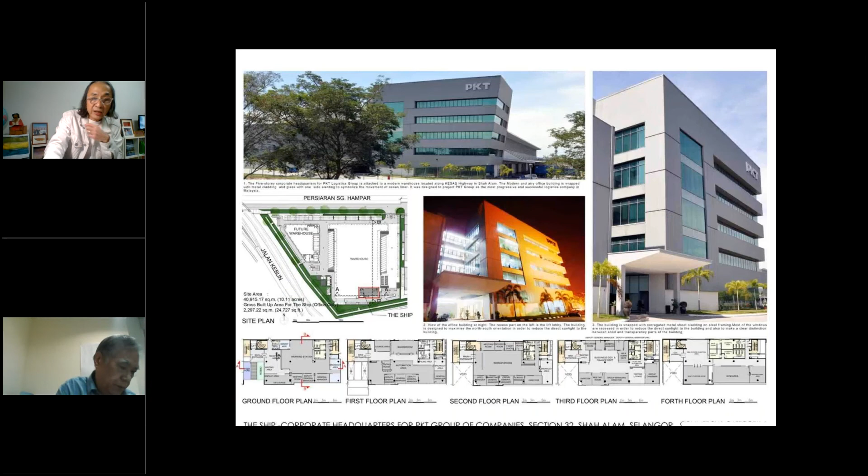The second project for Michael Tio is One Auto Hub in Batu Kawan, Penang, consisting of the warehouse, the university, and commercial development.

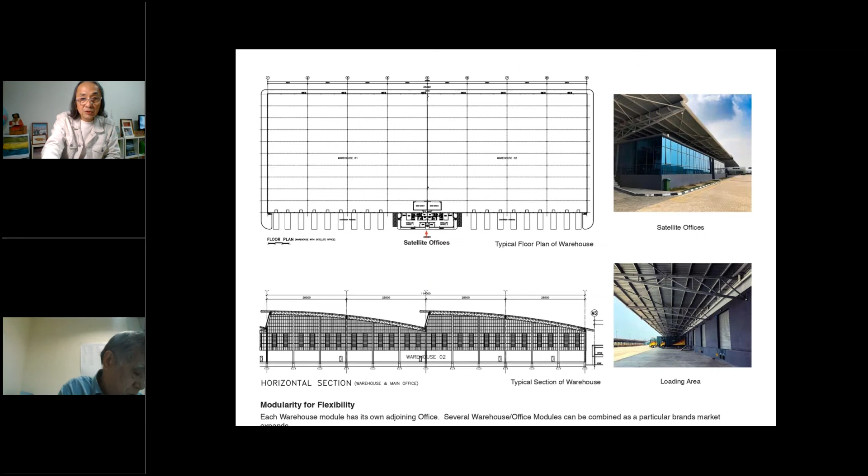First project completed is Jewel Wave, the largest warehouse in Malaysia. I think it won the FIABCI award in 2019. And the warehouse also has the longest Japanese garden in Malaysia, certified by the Malaysia Book of Records.

Coincidentally, the Malaysia Book of Records is also owned by Dato Michael Tio. I mean, he's my good friend, so I hope it's okay I said it. But anyway, it's the longest Japanese garden in Malaysia.

The next project, the second project completed at One Auto Hub, is the Ship Campus. It consists of a 9-story academic building for 4,000 students and student residences for 1,500 persons.

The academic block is designed for GBI Gold, with a series of sky gardens, sky terraces, and so on, and we also have skylights to bring natural light into the campus.

It is also designed almost like a convention center. It has 2 auditoriums, one with 550 capacity and the second with 200 plus capacity. I hope I can give an in-person lecture in this auditorium a few months from now, when the pandemic is under control.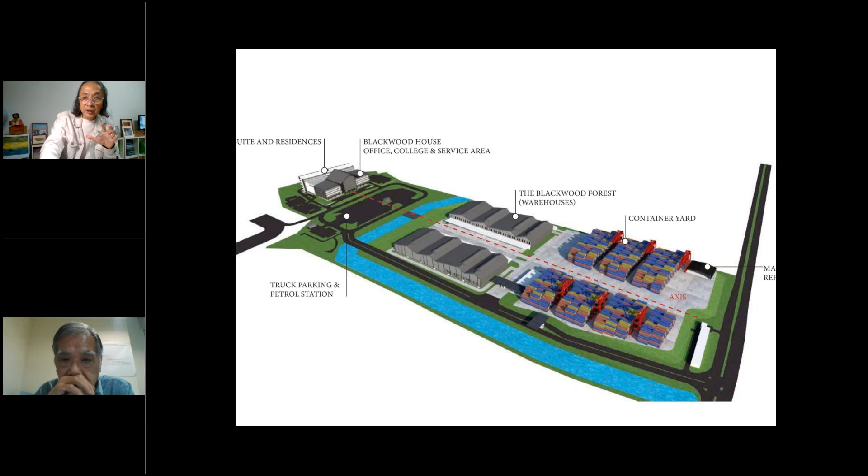Now we are working on another job for PKT Group, called One Northern Hub, consisting of 4 components. The first has a college, duty-free outlets, office, and a hotel. The second is a petrol station, the third is a warehouse and customs office, and the last is a container yard. Construction is going to start in the second half of this year.

In December 2019, I visited 2 project sites in Kuching and started working on both. The first one is Kuching Waterfront City, along the Sarawak River.

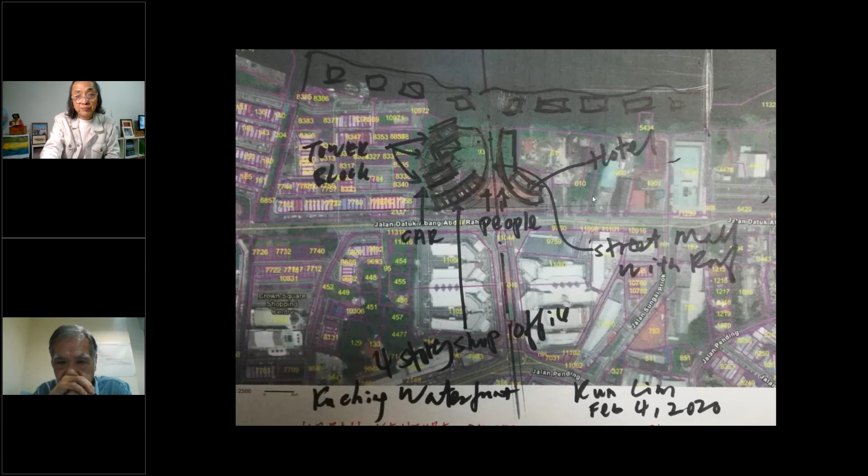I visited the site, a beautiful site. Immediately I decided that I should have a vista from the ICOM Square, or ICOM Plaza. Here's my sketch. The urban design concept is completed, but the project is suspended at the moment due to COVID-19.

In the second half of last year, I worked on 2 new projects in Sri Lanka. I have never been to the site, in fact I haven't been to Sri Lanka at all. I also never met my clients. My client at the moment is in Los Angeles; he has a PhD in philosophy from UCLA. I haven't met him yet, and I hope to meet him soon in Sri Lanka.

Both of us are waiting for our vaccine, and hopefully after we get it we can travel to Sri Lanka. The first project I'm going to show you was to design a dormitory for students at his college. It's a small project.

I immediately decided to keep the tree. There's a big tree on the site, and I made the tree the focus point of the development of the project.

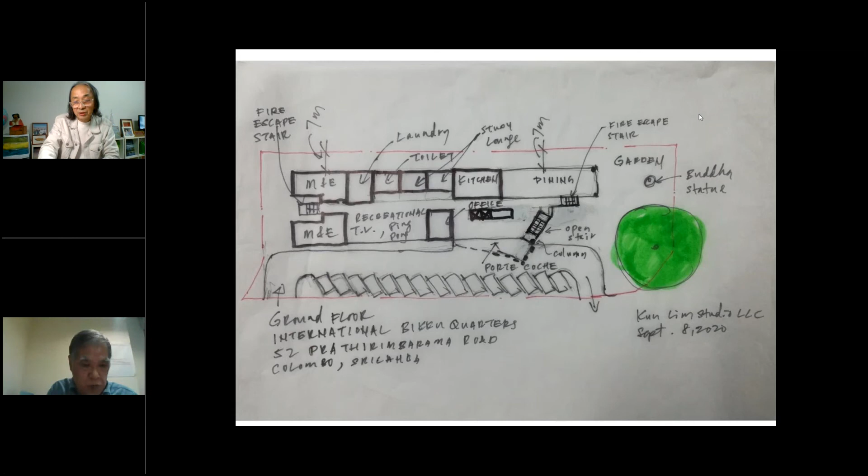There will not be air conditioning in the building, in the dormitory. It's going to be 100% natural air conditioning, natural ventilation, and so on.

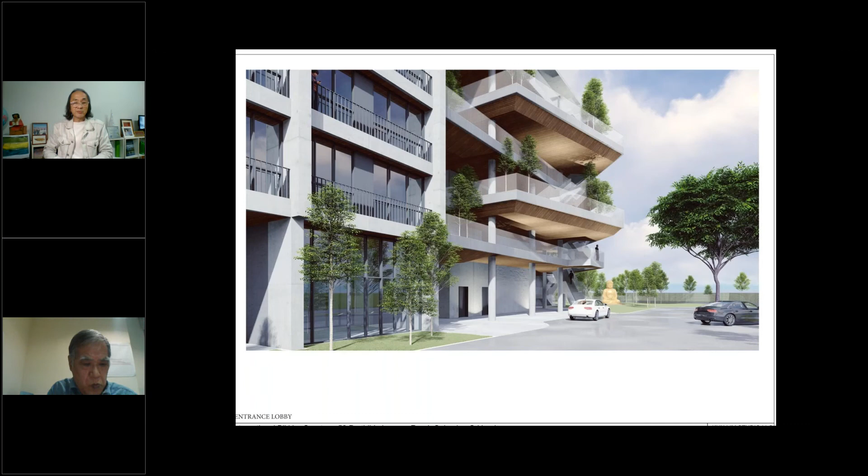This is a dormitory for the postgraduate students for the college of the study of Buddhism. I was asked to design something very simple, very minimal, comparable to the principle and belief of Buddhism: simplicity, less is more. I also designed a new education and media center for the College of Buddhism for the same owner.

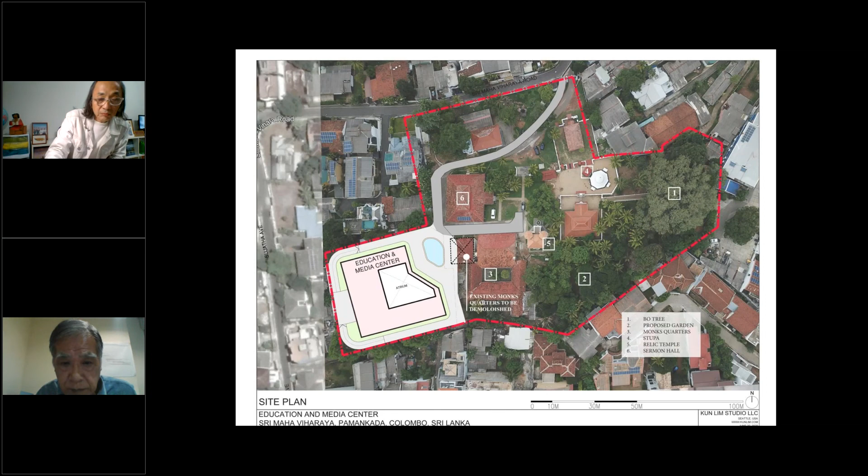Immediately I sketched out the concept, and then I decided that the building should have an atrium with natural ventilation. The atrium should be an orientation space for visitors to come in, so they'll know where they are and so on.

The atrium kept getting bigger, the building kept getting bigger when I received the design requirement, and it's going to have a gross built-up area of about 110,000 square feet.

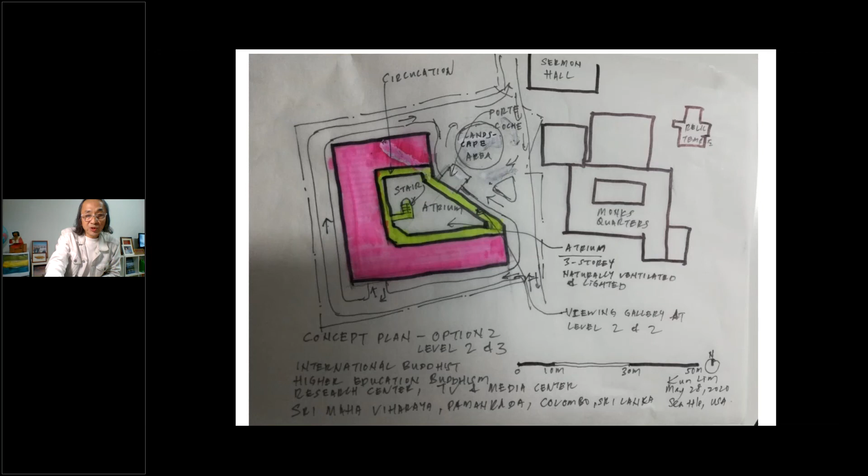And I introduced a lotus pond in front of the building. Lotus is a very important element in Buddhism. The lotus is a kind of plant that remains clean even in the middle of muddy water.

So it's something like, if you are a politician in Malaysia, if I say you are a lotus, it's like a compliment. I mean, in Malaysia, you are surrounded by sort of... sorry.

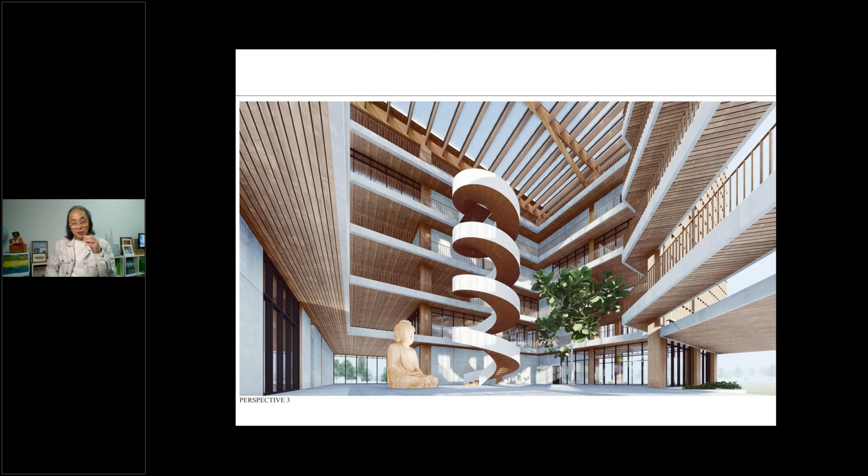I'm going to show you my last project. It's a 2-minute animation that we produced recently. This is the global distribution center for Daiso, Japan. It is going to be the biggest logistics center in Southeast Asia, with a built-up area of more than 3 million square feet.

The design might change completely. This is how we are, still at a very early conceptual design stage.

What I want to highlight about this project is it's going to be designed, at least for me, to meet the requirement for GBI Platinum in Malaysia. Green Building Index Platinum means we're going to use natural ventilation, natural light, and so on, rainwater harvesting.

The footprint of the building is about 1 million square feet, meaning we are going to have 1 million square feet of roof. I propose to cover the entire roof with solar panels. If it is built according to my proposal, this is going to be the biggest solar farm in Malaysia.